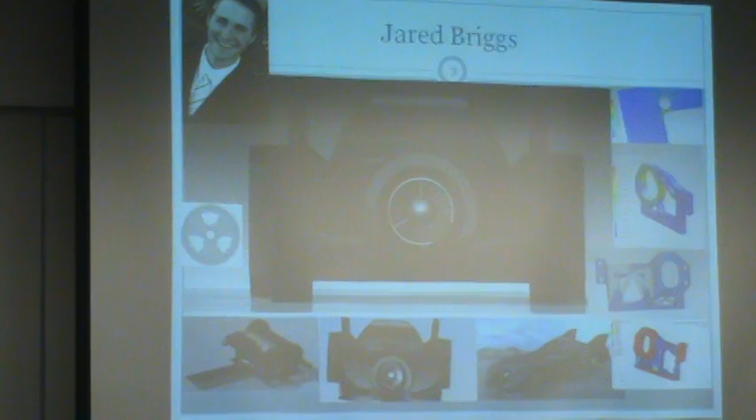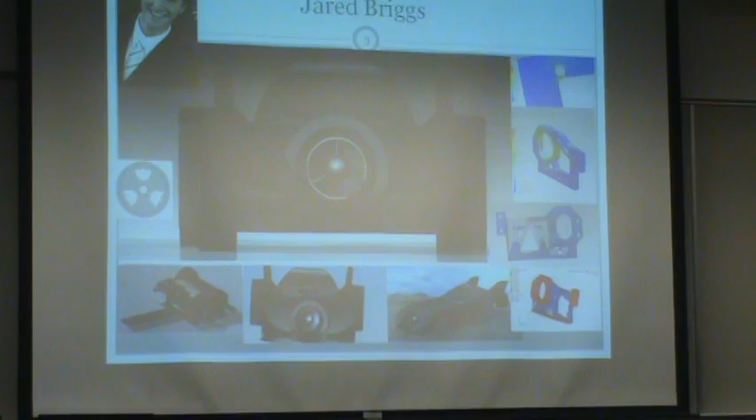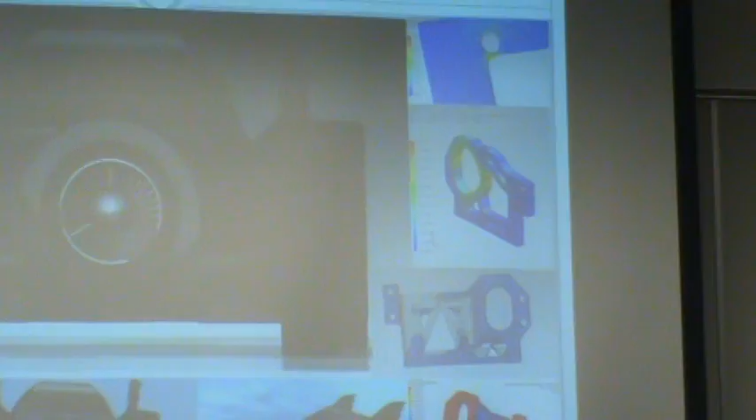So this is me. This is some of the stuff that I did for this course. I was the team lead for our team, and we modeled, I did, the Formula 1 racer. It's one of my preferences, because I thought it was pretty simple, but it turned out to be complex.

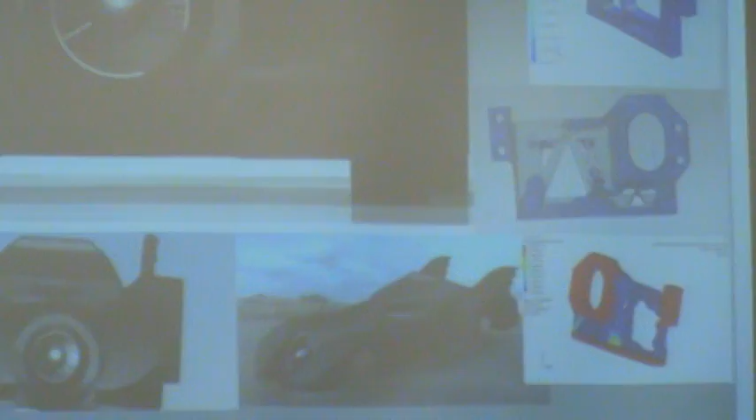As will all of the other cars. But it's something that, if you break it down piece by piece, it becomes much simpler, focusing on small parts and all of it together.

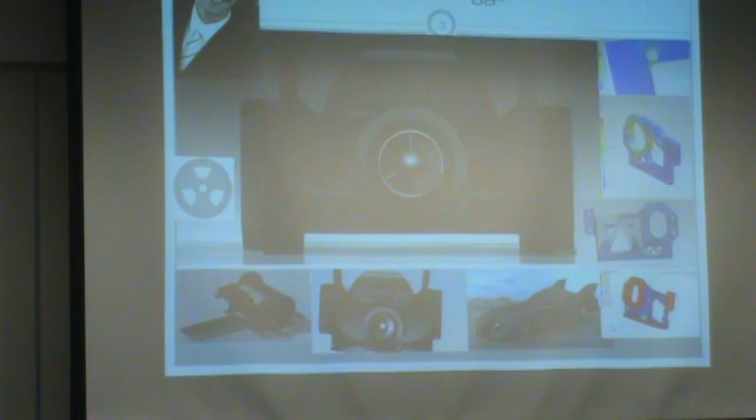So for my body, my shell, I modeled the 89 Batmobile. It's kind of a weird thing to put on a Formula 1 racer, but I thought it was pretty cool. And it was just a funny little rendering mishap, it made it look like the car's lightning.

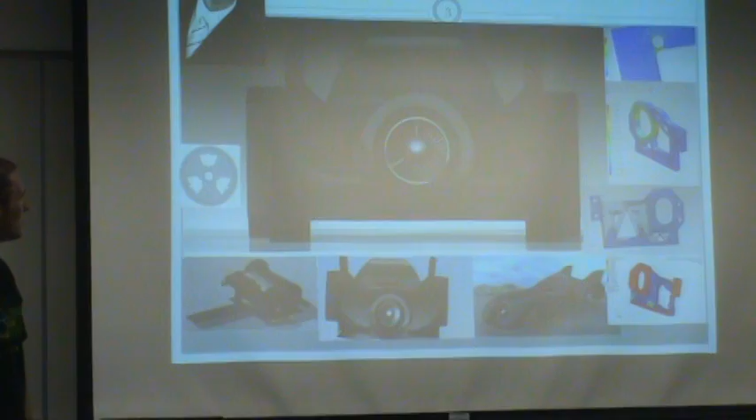Here's Mark. He's another one of our team members. This is the body that we chose to use for our CFD analysis. We'll talk about it a little bit more later, but it turned out to be pretty cool.

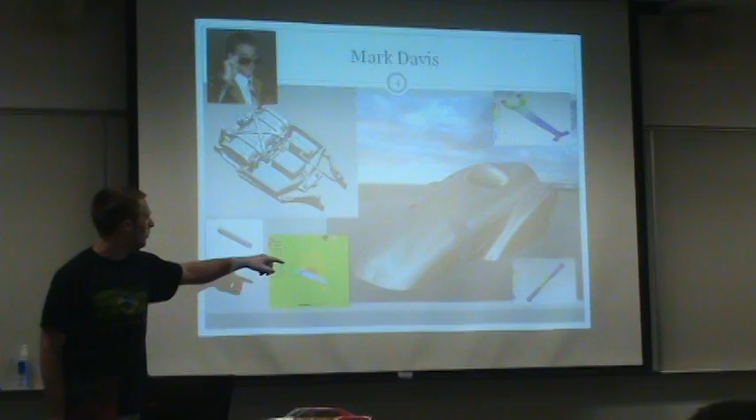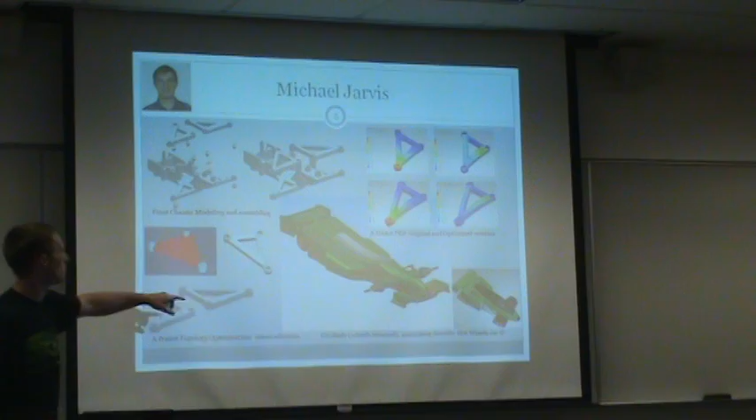And Michael, he did a lot of the modeling for the front. He modeled his body after a little Hot Wheels car. It turned out really, really cool, but we had some problems with it, so it wouldn't render part of it. So we figured out later what the problem was.

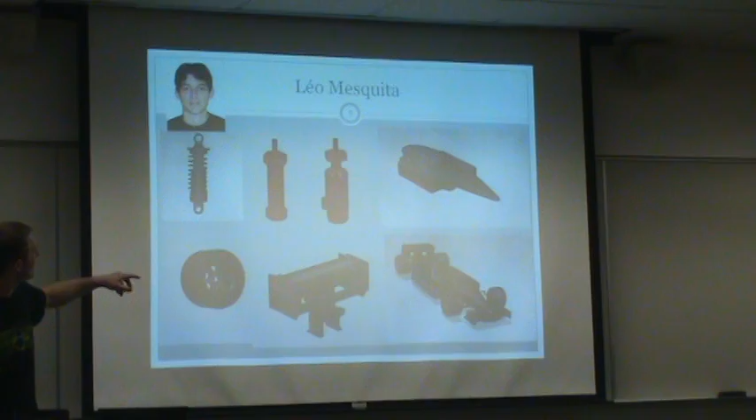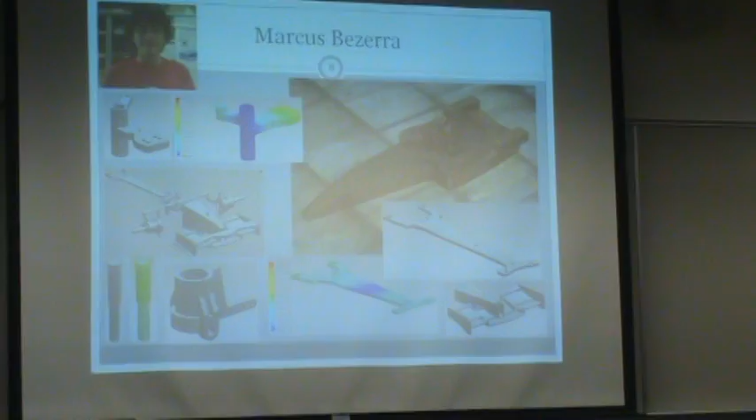Ivo, the Brazilians are really big into Formula 1 racing, and so they thought this was really awesome that we got this car. But they did this one, and then Leo, this one's hard to tell, but this one's got some insane geometry up through there. And then Marcus, his was the gold Beamer, it was pretty cool.

So for communication, this year you guys will be using Teamcenter Engineering for a lot of your file sharing and version control. It wasn't working last year for us, but we worked this summer to get it going, and it's working. So we use Skype and email to communicate a lot of our stuff, and then also the TCC collaboration tools.

The TCC is Teamcenter Community. It's a website set up for this class where all of the students across the world will be able to access it, with a log-on name and password. Each team has their own website on it, with a picture of the car, a calendar, a discussion board, and a place where you can upload and share files to each other. It's a secure site that only your team will be able to access, and the TAs with the right rights. There's also a link to an application sharing software.

This year we're using Join.me. Has anyone ever heard of that? Join.me is this wonderful little thing. It allows you to control someone else's computer if they give you permission to do it. It's like screen sharing with a kick. You'll learn more about that in the lab.

So then for file sharing, we also use TCC. You'll be doing a lot of it through TCE, Teamcenter Engineering, which is directly interrelated with NX, and then Google Docs.

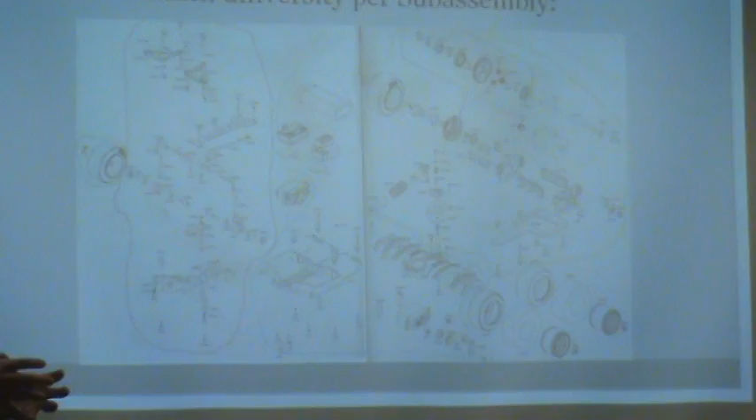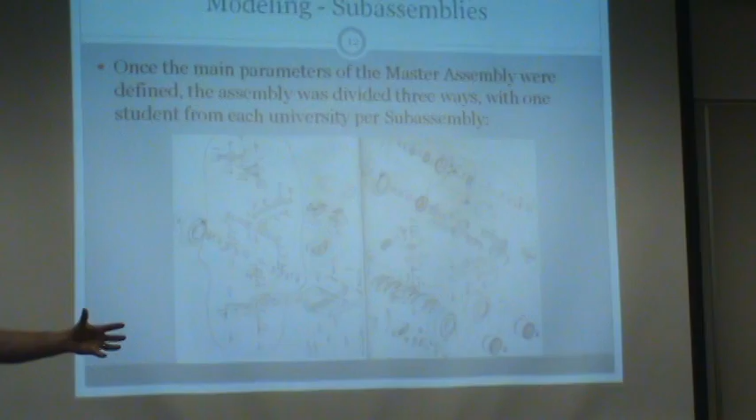So for the top-down approach, have you discussed that yet? Just barely. Okay, we set up the skeleton, the overall assembly of the car, in a top-down approach so that the parameters would be able to propagate from one to the other. And since we have so many parts, some of the smaller sections had to be assembled in a bottom-up approach because you have lots of parts. But those smaller sections were set up so that they would move along within the top-down assembly. So you get a little bit of a mix, which we found for our particular application made it quite nice.

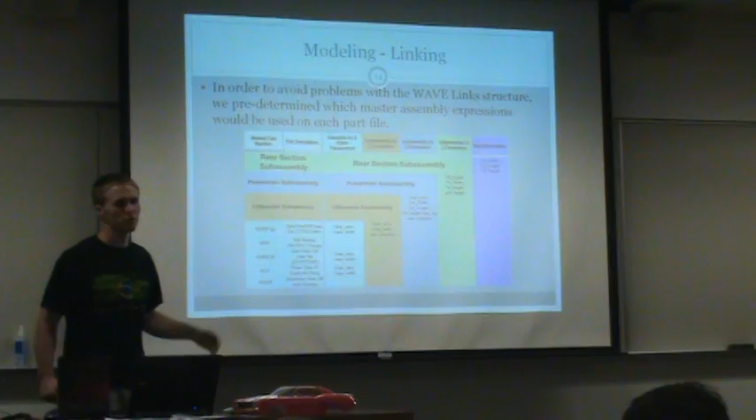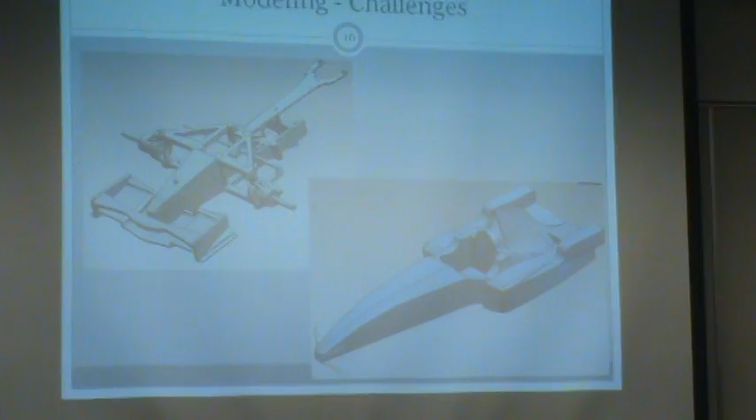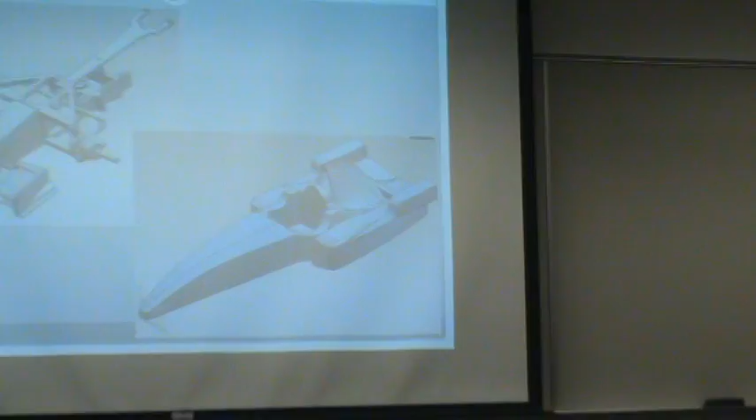Some of the challenges that we had - this is Marcus's gold beamer. You can see just how intense some of the geometry is just through there, that he had to overcome to be able to fit it over our model. And then this is one of the older versions that we had. We thought we had our parameters set right, but you can see some of the surfaces blew up.

And so it took a lot of debugging to figure out where that parameter was going wrong. But something that was very interesting.

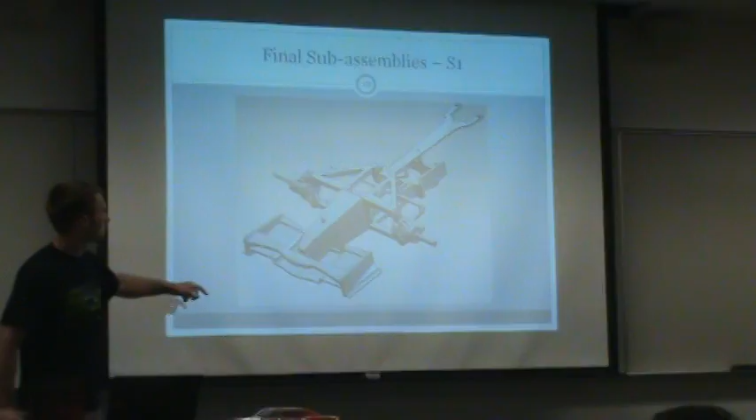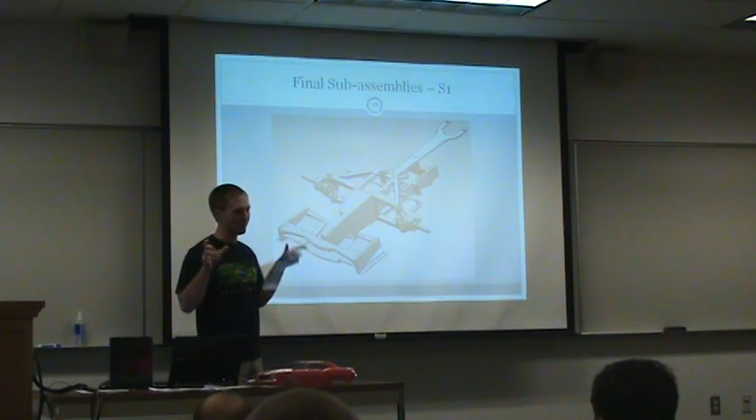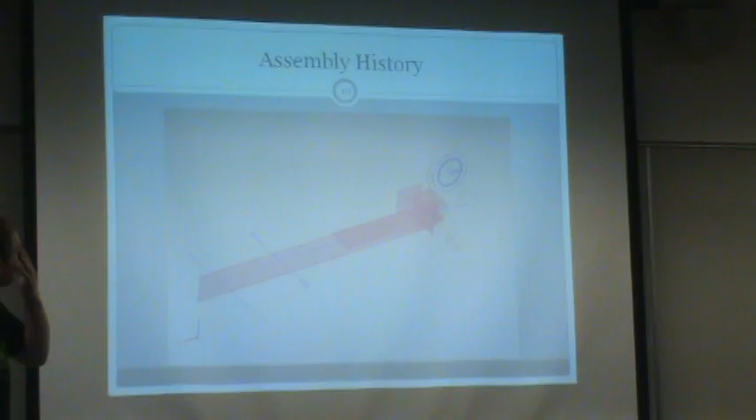This just shows our assembly coming together, kind of a time-lapse thing throughout the course of the semester.

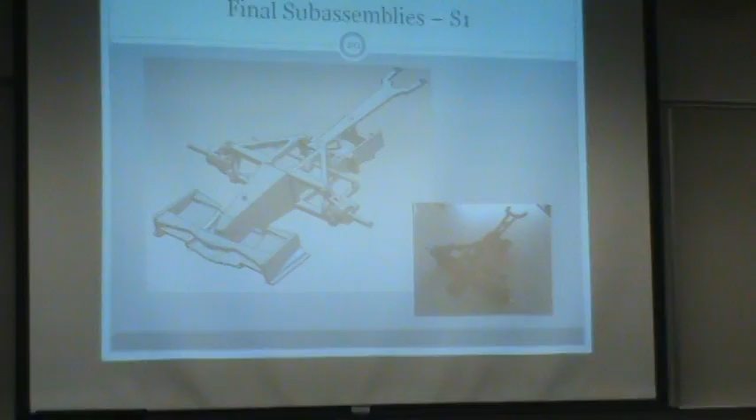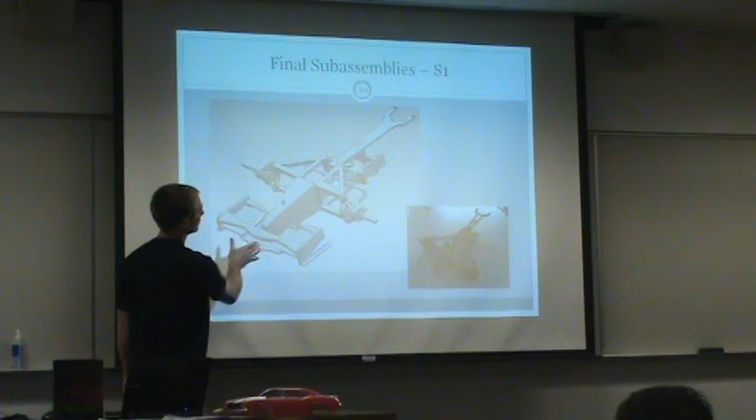And then we have our final setup of the front assembly, compared to here. This is the real thing, and this is our model. It's really similar. Here's the real thing, here's our model. It doesn't have the wires, we're going to get to that.

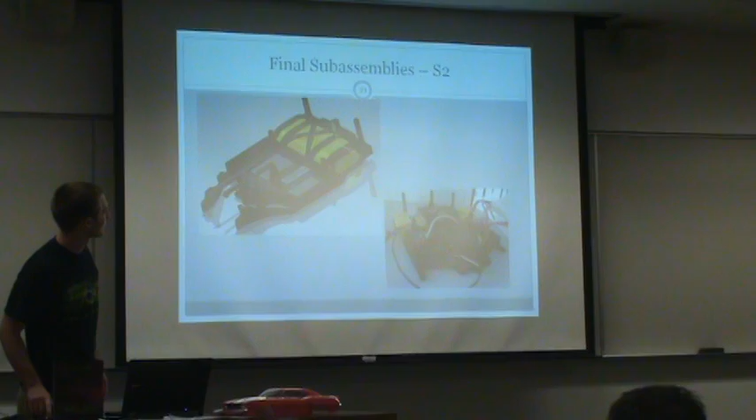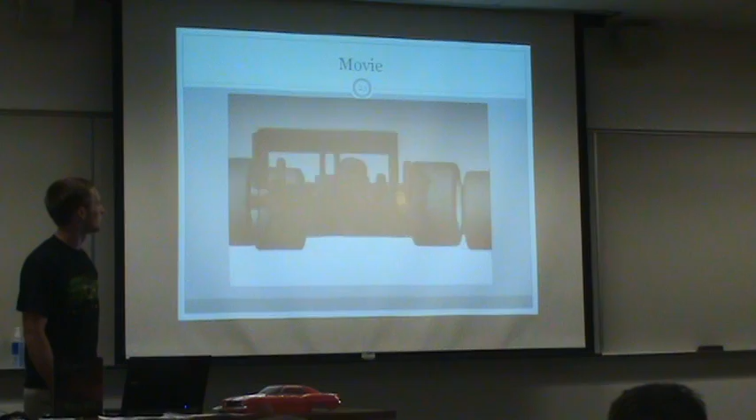And then we didn't get a picture of the back part because we had the car assembled and we realized we forgot to take a picture of it. But here's just a little fly around of the car. We'll show you how to do this in a later lab, but it's quite awesome.

Topology optimization that we did for the car. In a lab, we're going to show you how to take a control arm and optimize it so that you minimize weight and optimize weight for how much load you're bearing.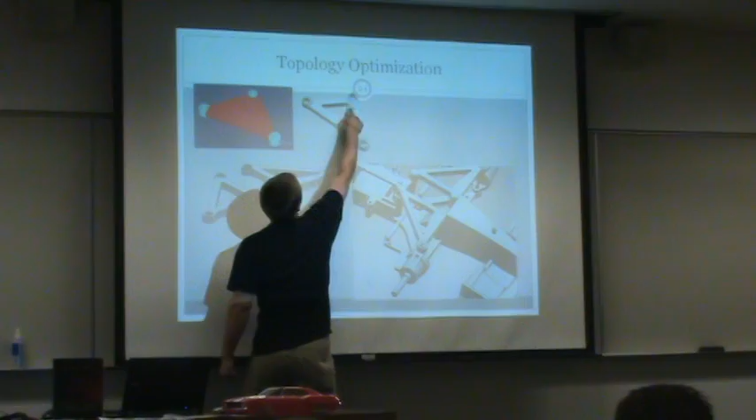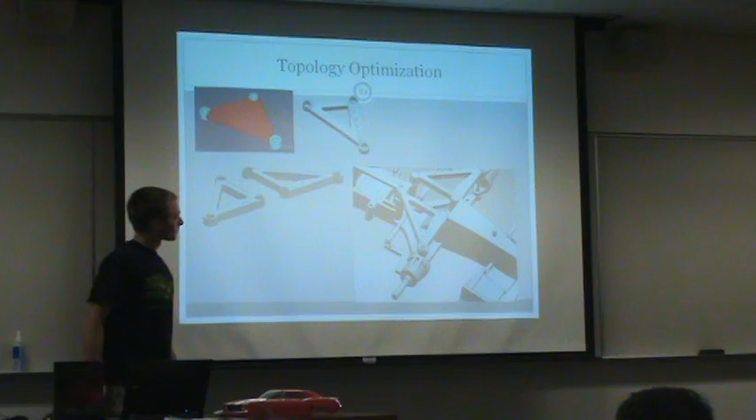In these cars, because they're toys, we don't really care about what loads you use. You just have to have some load, and then it'll show where that load is going and if it's reasonable or not. Here you can see this isn't really a reasonable solution because there's nothing right here. So that was one of our problems. But if you flip it over, you can see there's a little bit of a strut underneath this part that we had in a later version.

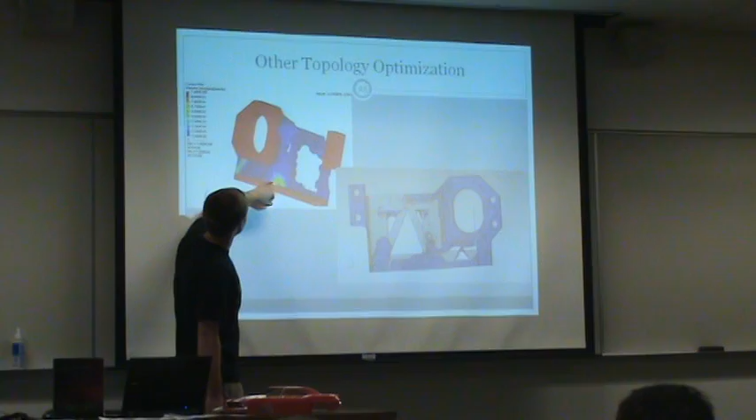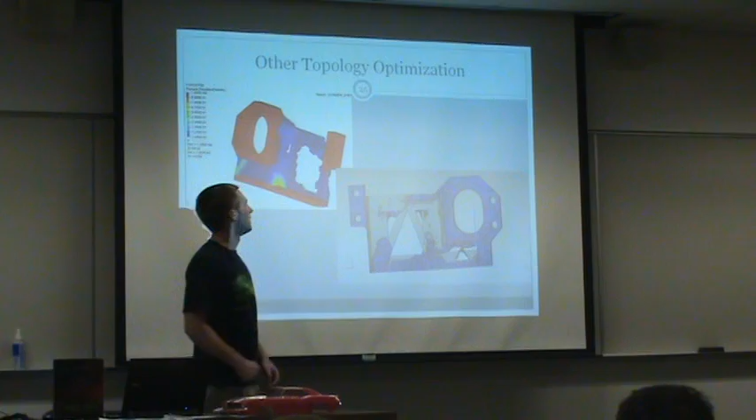Here's another topology optimization that I ran that shows this load path going here. There's stress there and here, and that shows where the material needs to remain. So this is the final product that we came out of, the gray, and then the blue is just what the computer said needed to be there. So we were able to match it closely.

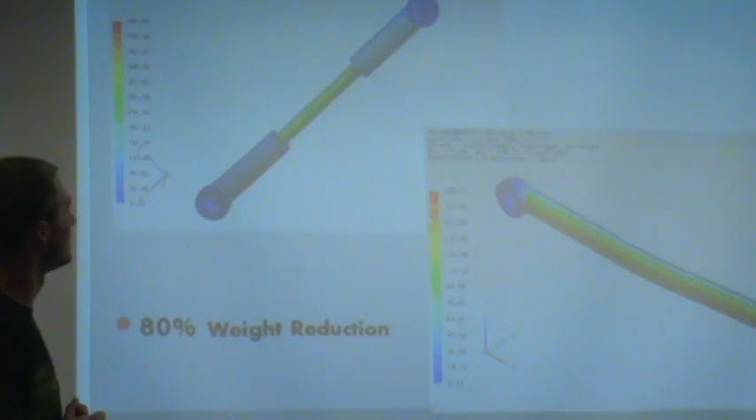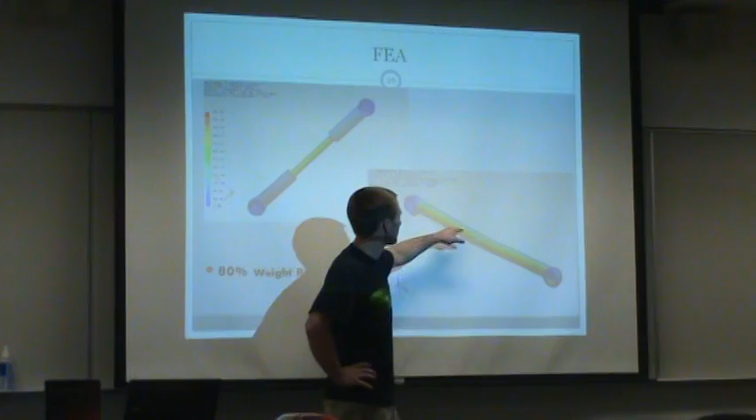So in this finite element analysis, this is one of the steering rods. You've got a little plastic piece, a little steel rod, and another plastic piece. And we found that by just modeling a single plastic piece, we were able to meet the criteria we needed for stress and bending, and still make it 80% lighter, which in a racing car is pretty good.

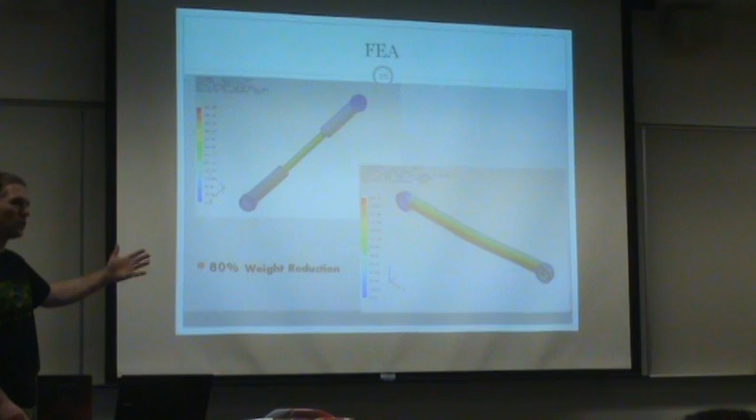But then we thought about it, and we need the adjustability associated with this to be able to adjust the steering angle of the car. So that's a trade-off. You could make it lighter, or you could not. That's one of the things we thought about.

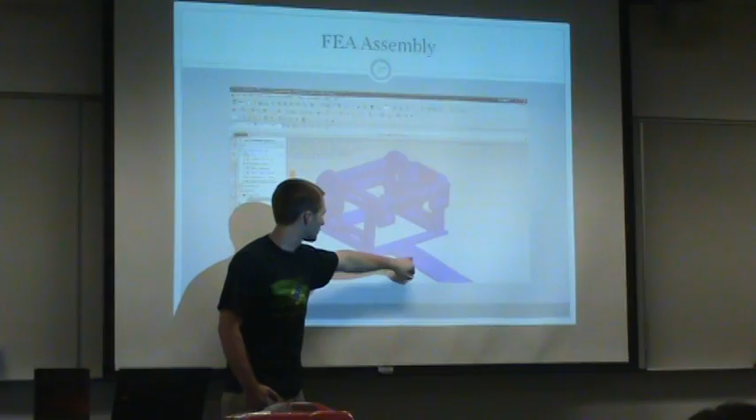This is just a simulation showing the stress concentration here. This is the suspension of the back, which is really just a compliant member. Because the Formula One racer is so low to the ground, it's just bending on this composite piece right here. I think the bell's gonna ring, so maybe-- okay.

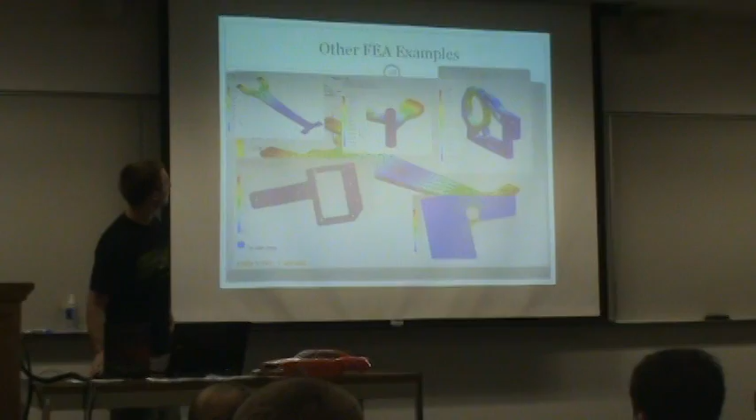Just punch through. Here's just some of the mass properties we did. We showed how we could make this 45% lighter by making it hollow. And then just some of the mass properties of how the load is distributed in the car.